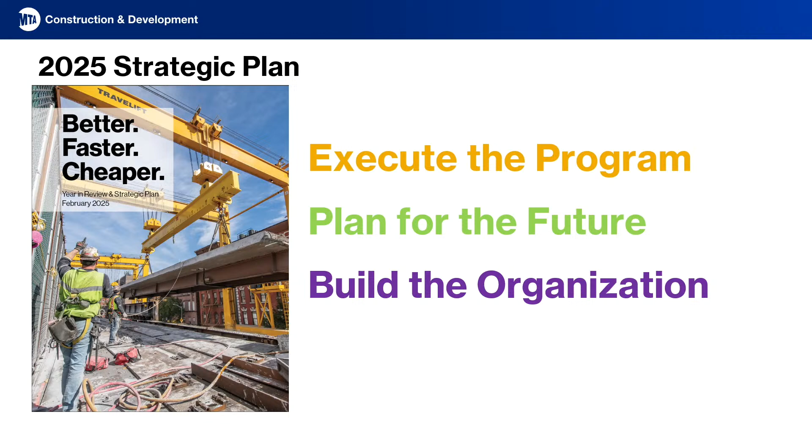So February is when we typically do the year in review for C&D and the look ahead. And of course, while there are major funding questions to be answered, we continue to do the work at construction and development that this agency was created for, to execute the program better, faster, and cheaper, to plan for the future of this vast system of ours, continuing to transform it to meet the needs of the 21st century, including different customer expectations, climate change, in addition to the need for a state of good repair, and to build a sustainable organization that has the professionalism, the specialized skills, the management expertise to deliver far into the future.

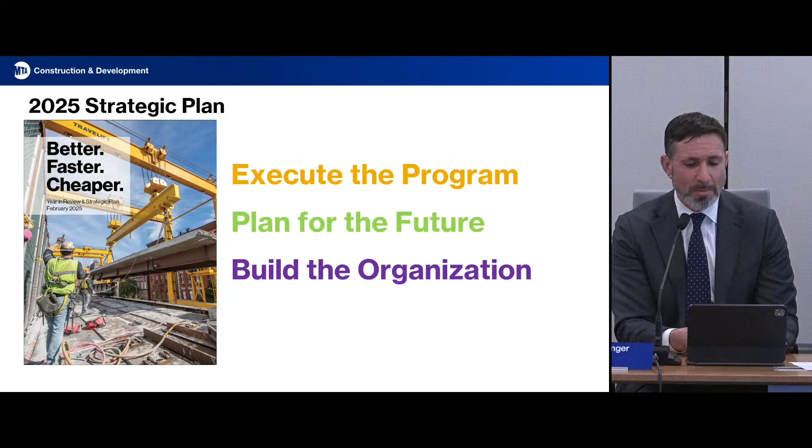We're going to deliver our strategic plan later this week, summarizing all of this, but I want to give you a preview of it today.

So first of all, looking back and setting our targets for the year, in numerical terms, we achieved $4.6 billion in commitments last year. I want to start by saying that this exceeded our target that we set for the year of $2.9 billion by 60%, through a lot of hard work at C&D to get those projects over the finish line and awarded. Of course, this number, as you can see on the chart, overall is less than we aspired to before the complexity of implementing congestion relief slowed us down last year. But nonetheless, we have some really important work that got awarded last year, and at very good pricing.

3 stations, ADA stations in the Bronx for Metro North, Woodlawn, Williamsbridge, and replacement and state of good repair work at Botanical Garden for $157 million, big project there.

Line structure component repairs, we've talked a lot about tunnel structural repairs and the importance of them in our next capital plan, but we awarded a project to do that on the 7th and 8th Avenue lines in Manhattan and the Bronx. And I want to note that we're going to add cell service through our public-private partnership with Boldyn as we do that structural repair work as well.

Park Avenue Viaduct Phase 2, which the board voted to award that additional work on. Evan's going to talk about that in a little bit, but it allows us to do the other half of the viaduct that carries 98% of Metro North service into and out of Grand Central as part of this current project, saving a lot of time and a lot of money.

Okay, is the Grand Central train shed part of that line structure piece? It's not. The Grand Central Train Shed is a project that is awarded and is moving, Sector 1. But also very important work. This is line structures within the subway system, where there's a huge amount of work that we need to get done.

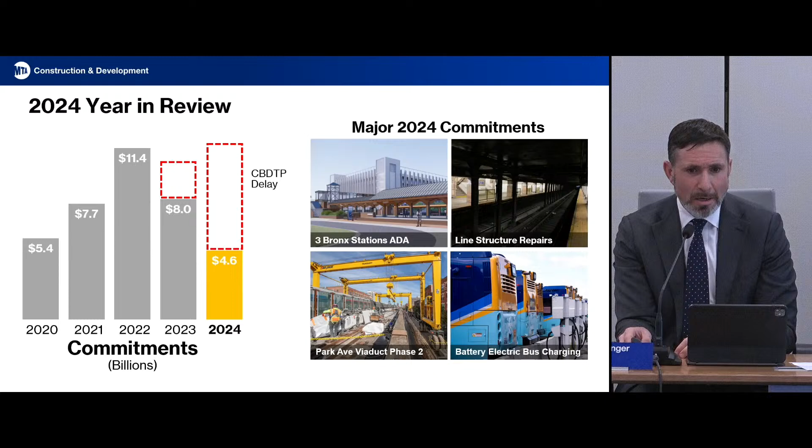All right, here we go. Big commitment year this year. Now that congestion relief is unlocked and we are able to proceed with the projects that we need to do, some key commitments that are not congestion relief funded, critical component repairs.

This is state of good repair work at fan plants across the system, fully electrifying track 1 of 11.5 miles of the Hudson Line, adding critical redundancy and operational flexibility, and dehumidifying the main cables of the Verrazano Bridge. We've talked about this a lot here in this committee.

This project is going to preserve the cables that hold up the Verrazano and extend the life of the structure by decades. So $12.6 billion commitment target, that would certainly be the biggest commitment year ever for the MTA, and we're moving forward in a big way to get it done.

Big forward movement for congestion relief funded projects this year as part of that $12.6 billion target that we're announcing today. We've already awarded 22 dual mode locomotives for Long Island Railroad, 270 more battery electric buses. That option has already been exercised, funded by congestion relief, and we've got big projects moving.

We talked about it a lot, the re-signaling of the Fulton and Liberty lines, the A and the C - that's 42.7 track miles, really critical to get service moving on that line. Of course, the 2nd Avenue subway tunneling contract, for which the RFP is out in the market. At the moment, we're aiming for a summer award of that project.

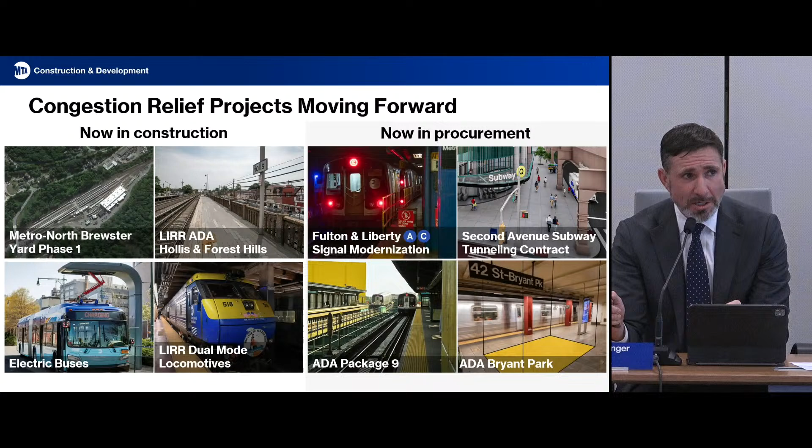ADA packages for 5 stations moving forward: the 3 stations in our package 9, Parsons Boulevard on the F, Briarwood on the E and F, a newly added station to the program, Gates Avenue on the J and Z in Brooklyn, and then 2 stations at Bryant Park within that complex. 18 more stations to go on top of that, funded by congestion relief.

In terms of completions, some generational projects, very complex and some long delayed, that C&D took on and tackled and got across the finish line this year. We finished that most difficult 100th of 100 original key ADA stations at Hunter College, and saved money in the process, both from avoiding utility relocations and bringing the project in under budget.

At completion, we finished rebuilding the Harmon Shop for Metro North. We rebuilt 207th Street Yard, made it much more resilient. It's the 2nd largest yard in our system at 43 acres, and we built a flood wall and dealt with all the drainage around that yard, kept service running the whole time.

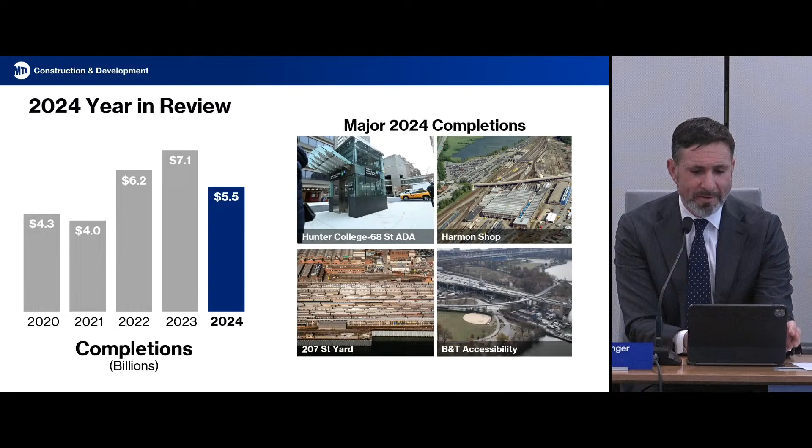We made bridges accessible for bridges and tunnels, Cross Bay Bridge, Henry Hudson, and connections to Manhattan and the Bronx from Randall's Island, with the Queens section to be completed in a separate project in 2027. So some important completions. And for this year, we'll complete $9 billion of work.

We will complete the big ADA package for Long Island Railroad. We've already got 3 stations open and fully accessible in that package, 3 more to go - Laurelton, Locust Manor, St. Albans this year - plus replacements at Valley Stream and Auburndale, and more work on the Verrazano Narrows Bridge. So that's our target for this year.

In the meantime, the work continues to get the 25 to 29 capital plan off to the right start once it's authorized and fully funded by the governor and the legislature. While we have some work left to keep us busy here, we have put forward a $68 billion plan that enables us to move forward with critical state of good repair work that cannot wait. We're taking on some of the key capital maintenance issues that threaten safe and reliable, frequent service across the system. So a lot of projects are moving into design, and we're looking at the big upfront scoping and bundling decisions that determine whether we can execute this work better, faster, and cheaper with the time that we have.

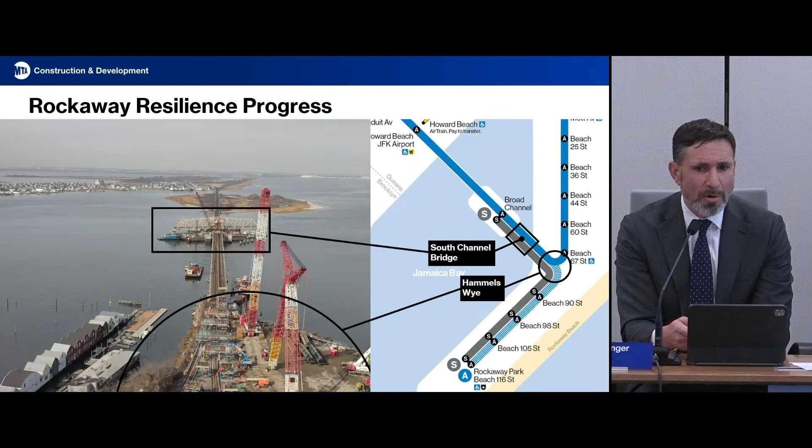So we took a big step back and identified that this was not the way to go, and combined them so we can get all the work done in a $600 million mega project that keeps disruption to a minimum. We certainly don't like any disruption of service, and we've poured on a ton of replacement service, shuttle buses, cross-honoring, and other means of transportation, keeping the shuttle active on the Rockaway Peninsula itself. But we're doing it in the most efficient way, and we will bring that service back before Memorial Day.

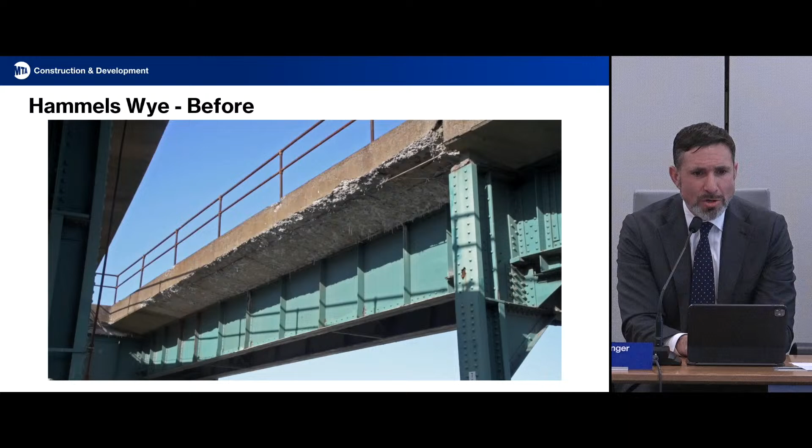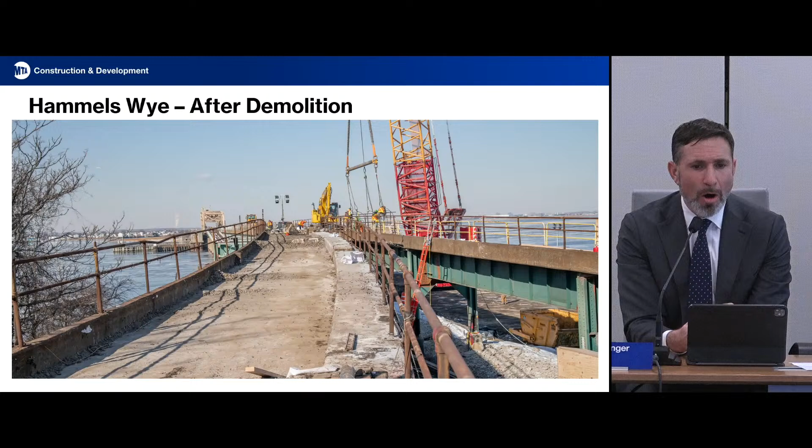A few good shots here. I'm pleased to say that the work during the outage is progressing at an extraordinary pace. You can see the old concrete and steel structure—this is just one month ago when we started. Once we took service out, we quickly demolished the track bed and all the electrical and signal equipment that ran along the top of the viaduct, so the Hammels Wye was no more. This concrete structure I'm showing here was sitting right above where this gentleman is standing in the foreground. That was very quickly demolished.

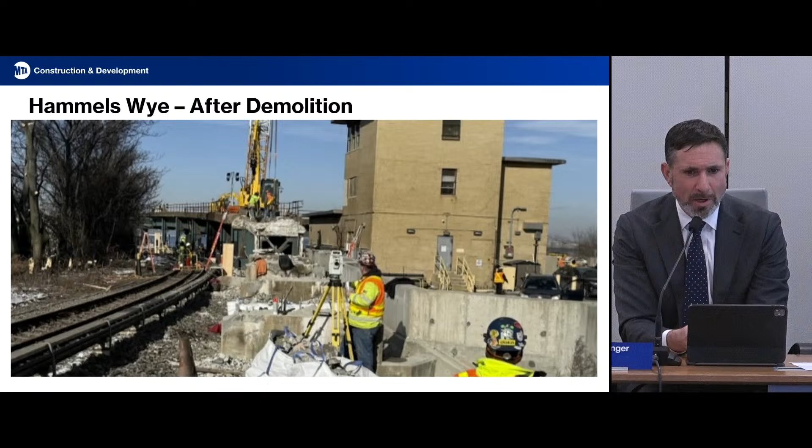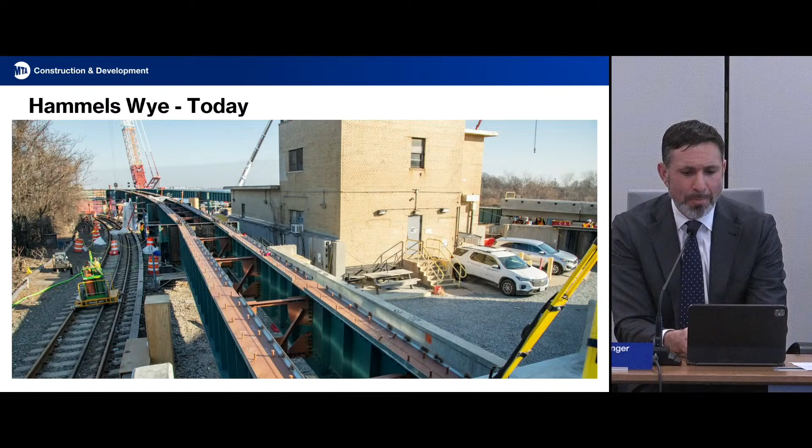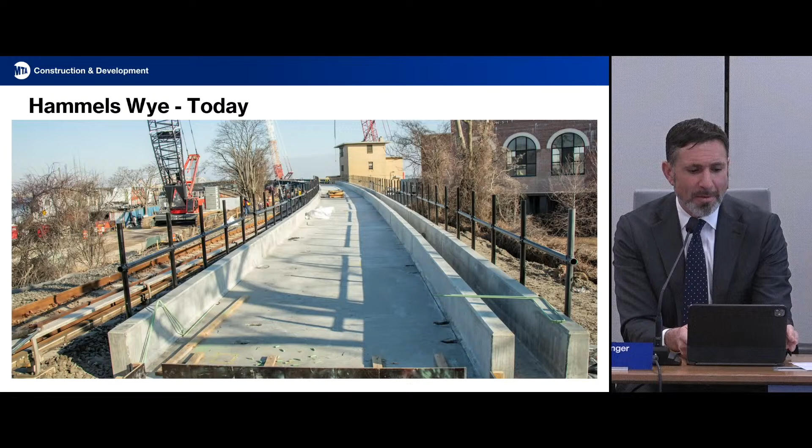But just a couple of weeks later, our team has already rebuilt much of the structure. One big section will sit on steel girders, and as of Friday when we were out there, 30% of those steel girders had already been put into place. Another portion, the concrete section of the future structure, was prefabricated off-site—a great innovation in construction means and methods—and has already been dropped into place on top of the pile caps, ready for all the equipment to follow.

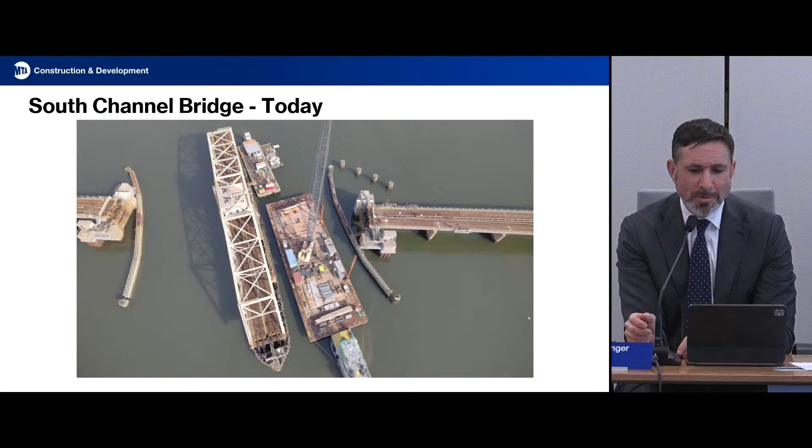The South Channel Bridge has been lashed into an open position so that, as you can see, the maritime traffic, which includes shipments of jet fuel for JFK Airport, can continue to traverse into Jamaica Bay. And all of the mechanical and electrical systems on the bridge have already been demolished and are now being rebuilt. We're on track to bring service back on time and on budget before Memorial Day.

But we have endless amounts of respect for the workers. All forms of labor are out there working, and they're working two tens, seven days a week. So we've got 20 hours of work happening every day, in the middle of the night. Get out to the Rockaway Peninsula, the temperature falls and the wind picks up by 10 or 20 miles an hour, and the work is getting done despite all that. We're very proud of how that project is going.

What's all this strategic planning and innovation about? Cost containment. And we want to talk about that in more detail this week. Like our operating agency partners, we are committed to being great stewards of public funds.

The big innovation of creating construction and development is the prime mover here. The kinds of cost containment we've just talked about are only possible because we have centralized management of all capital work, from planning to procurement to delivery. We take responsibility for it from beginning to end, and it allows us to intervene in the places where we need to in order to get the work done better, faster, and cheaper.

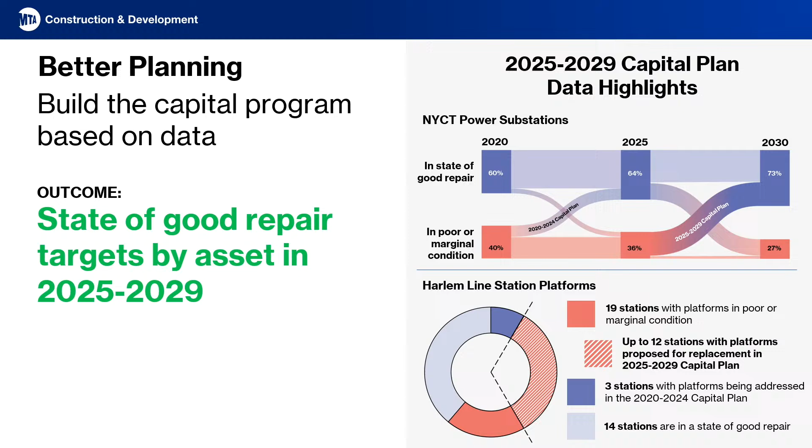The 20-year needs assessment resulted in our proposed 5-year plan that's focused on state of good repair. In the 5-year plan, an important metric we set was not just the proposed budget, but also what the public would get from the investment. What I mean is, asset by asset, we're projecting state of good repair outcomes at the end of the 25 to 29 program.

On the upper right here, you see our famous Sankey diagrams where we show you where on state of good repair we were in 2020, what the 20 to 24 plan was supposed to get us, and where we anticipate we'll be at the end of the 25 to 29 program, assuming both how much work gets done as well as how quickly we anticipate the assets will continue to deteriorate.

This predictive model is new and helped us identify the right scale of investment and helps us prioritize which categories need more investment than others. It also has the benefit of giving the public a deeper understanding of what they're getting for the dollars spent.

Getting our assets into a state of good repair is not the only factor in picking the right projects. We need to be smart about the scope, and one way is to anticipate the risk.

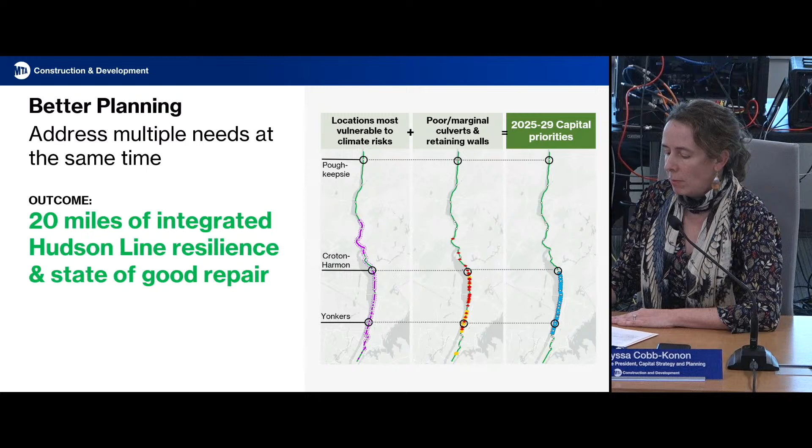Climate and weather have cost us countless hours of service delays, and that's why a project like the Hudson Line is important. Here we've layered on more than one criteria, state of good repair and weather. So when we say we need to address resilience on the Hudson Line, it means that when we rebuild the 25-plus culverts on the Hudson Line that are already in poor and marginal condition, we're building them to the right size so that we don't have major washouts that impede service.

Another way to build smarter is to make sure we're planning for the function the asset serves. By way of example, we've all heard about Livonia and 240th Street, that the conditions there are deplorable, but also that the layout of the facility is obsolete. 240th and Livonia are part of a much bigger system of shops and yards that encompass over 440 acres in New York City, built 100 years ago by competing subway lines.

With subways, we'll be redesigning Livonia and 240th so they fit into the overall system, improve efficiency, and deliver the best possible service for New Yorkers, making way for CBTC on the A division.

We're excited to take on this kind of work across the portfolio, implementing an integrated planning approach to help ensure that we spend money wisely, deeply understanding the condition of our assets, and layering on what we need to do to modernize the system, to build it for another 100 years of service, adapting and anticipating ridership trends, and where public and private and cross-agency partnerships can be found across the system.

With that, I'm handing it over to Steven Loehr.

Thank you, Alyssa. Good afternoon, everybody. I'm Steven Loehr, I lead the development department here in C&D. What we do is take the priorities identified by planning and our operating agencies and package that work together into contracts for optimal execution, then hand them off to Evan.

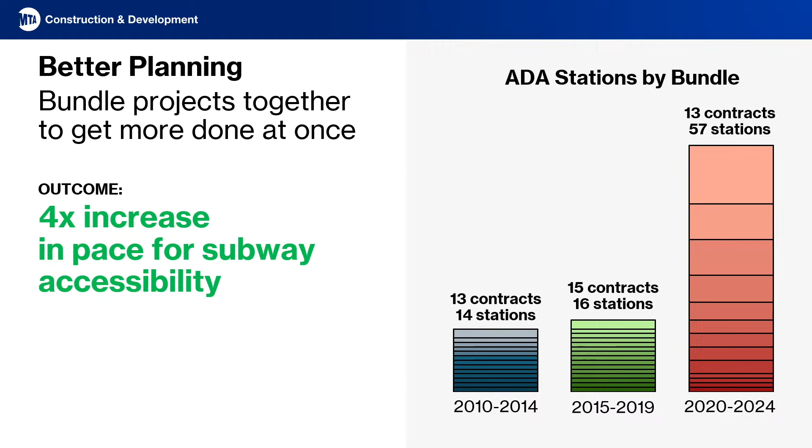Before I get to that, in the current 2020 to 24 plan, bundling has allowed us to dramatically scale up the level and pace of work in areas like ADA stations—a fourfold increase in the number of stations we've awarded, because these larger contracts let us scale up as we deliver.

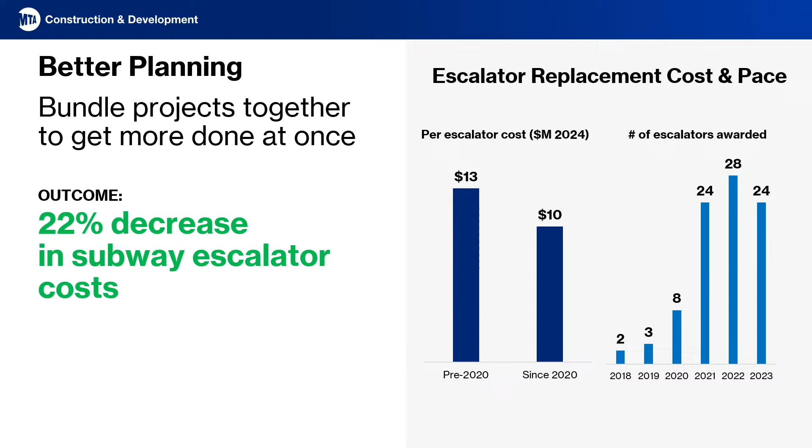It's also allowed us to save money by leveraging economies of scale. A great example is escalator costs, where the unit cost has decreased by more than 20% by awarding these together in larger contracts. That's the kind of work we want to continue in the next plan.

But we're 5 years into this, so we've graduated to the advanced level of bundling—getting more sophisticated, getting creative, and learning lessons from the 2020 to 24 plan, so our bundling isn't just about creating bigger projects now, but really creating better projects.

We've been launching the next plan by systematically going line segment by line segment, laying out all the needs and breaking down traditional divisions between types of work that we've usually planned around. I'll give you two examples.

Our ADA projects typically include electrical work just by virtue of having to include an elevator. We realized that while a contractor is there doing that type of work, if there's a circuit breaker house at the end of the platform, they could just as well take that on. Traditionally we'd consider that an infrastructure project, part of our power system, a different thing entirely. But we've broken down those walls to say this contractor is capable of doing this type of work—let's pick it up here.

Similarly, when our infrastructure unit repairs structural defects within the tunnels, they could just as well repair columns on a platform of a station they're passing by, which traditionally would have been a separate stations project.

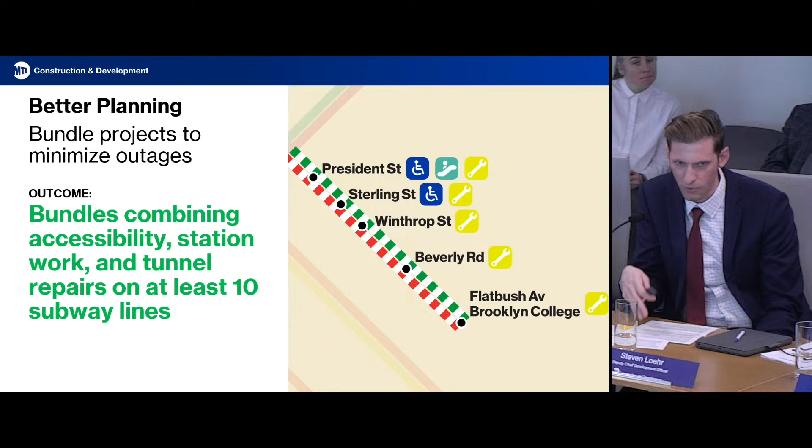So far we have at least 10 of these integrated bundles, still working through the later years of the program. Shown here is one example on the Nostrand Avenue line, where we have component work at 5 stations—2 ADA station projects planned, an escalator replacement, and structural defects all along the line. Traditionally this would have been 4 separate projects, all competing for resources and access with their own jostling schedules. Now it will be one integrated project, executed simultaneously.

We need to get 12 stations rehabbed. We'll be doing that in successive waves, immediately following one another over the course of the next 4 years. We have one master plan for that to make sure it all gets done.

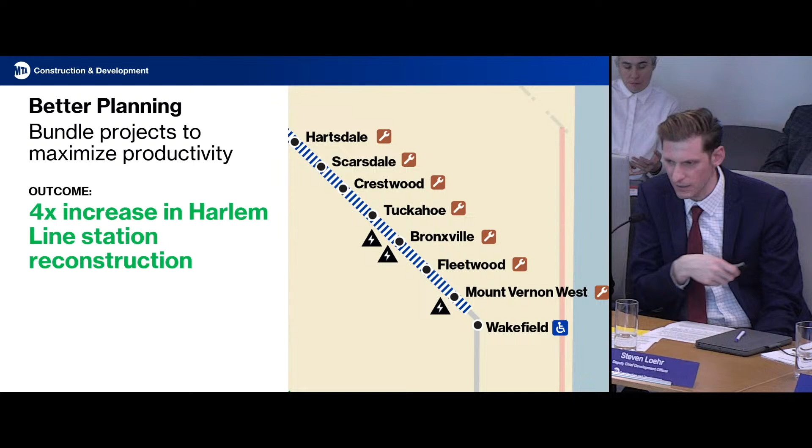So it may sound basic, but it's a very significant shift in the way we organize our work, and it will yield tremendous benefits, both in terms of minimizing disruption, which is key, and in terms of reducing our costs. We're very excited about that—not least of which Evan, who gets to contract out all these bundles for us.

In our contracts group, we're giving a lot of attention to updating our contract documents to address cost risks raised by our consultants and contractors. During procurement, we encourage questions, comments, and proposed alternative contract language, and we regularly meet with contractors and consultants, both individually and through industry groups like the GCA and ACEC, to hear their concerns. Through that engagement, we've identified numerous contract provisions that we've modified to remove historical language that is often one-sided. The most obvious of those was replacing the chief engineer provision.

They were the sole trier of facts, and now we use a neutral arbitrator. But we've also addressed risk in other ways. One example of that is our new utility relocation risk-sharing provision.

This provision apportions costs to the design builder only up to a predetermined amount. If there are utility costs above that amount, the MTA and the design builder share that risk up to another predetermined amount, at which point the MTA takes on the risk. So in this way, we've incentivized the design builder to keep costs down and at the same time limit its risk exposure for conditions that could not be anticipated.

Another new risk-sharing provision provides for compensation for certain instances of delays caused by the unavailability of tracks or access to force account, which were historically non-compensable delays. We also have recognized that prompt payment is an important consideration, and we've implemented a process to provide quicker payments for directed change work. And we've addressed other issues that have been raised, like indemnification, standard of care, and insurance requirements.

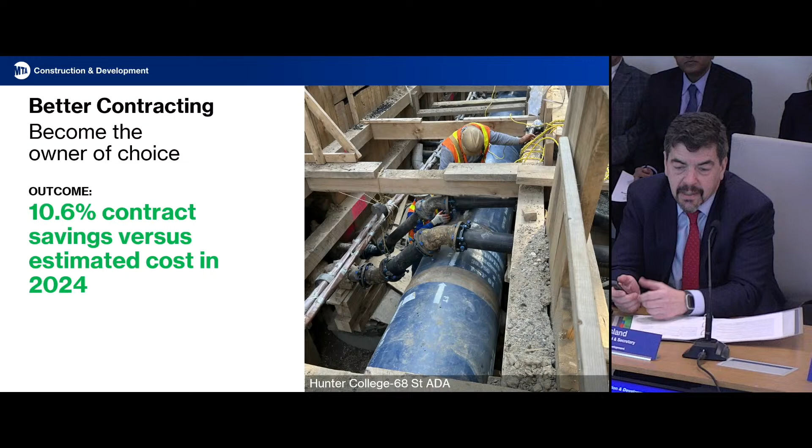We've seen good competition since we've implemented these changes, and the 10.6% contract savings versus estimated costs in 2024 I think recognizes these changes that we're making and the competition that we were getting.

So we're also looking at getting the delivery model right. Introducing design build was transformative for C&D, but we're now evaluating contracts earlier. We're making wiser decisions about when to use design build and when to use other delivery models to best encourage competition and innovation.

So we've been using A+B bidding to our advantage for smaller contracts and those where there's not much room for innovation. A+B bidding allows us to take into consideration schedule and track access. In evaluating best value, it also helps us to get smaller contractors involved, and that helps us to keep prices down.

And on more complicated projects, we're engaging with contractors early, both pre and during procurement, to encourage alternative technical concepts and innovation. One example of that, Jamie mentioned earlier, is the Park Avenue Viaduct, where the contractor, through its innovation, saved us $95 million and 4 years on the 2 phases of the project.

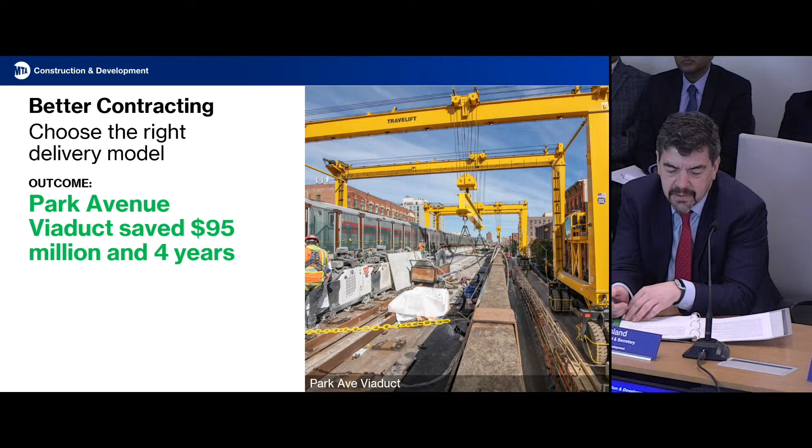Notably, this contractor did not propose the lowest price, but because of the schedule and track outage savings and other innovations it offered, it came in as the best value to the MTA. Another example of contract innovation is our accessibility packages.

We've hit our stride on those. We were up to 6 bundles that have been awarded, plus some additional station complexes, and we improved those contracts with each iteration. We're seeing good competition, and design builders are seeking to participate in multiple packages.

And the risk-sharing strategy that I mentioned before is one example of an improvement that was developed using these or during these ADA packages. We also awarded our first public-private partnership, which is going quite well and has brought us a new elevator supplier, Otis Elevator, which prior to this P3 was not proposing on our ADA project.

So implementing new delivery tools is helping us to increase competition as well. On the ADA packages, we've seen savings bid versus estimate of $243 million since 2020. So with that, I turn it over to Mark to deliver the packages that we've now contracted for.

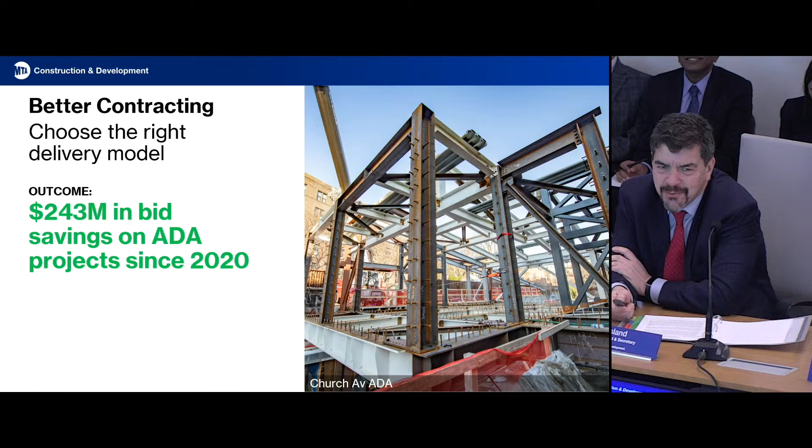Thank you, Evan. I get to look over the design and the construction of our projects. So I'm going to give you a couple of examples of our projects and what's really changed over the last few years.

I don't know if you realize it, but you approved a project back in December of 2022 called CBTC Crosstown. You approved $380 million to do that project. I don't think you realize that that was $300 million less than was expected. We saved almost 50% of the cost of that project by doing it differently.

What we did differently was we got out of the way of the design. We gave the design and the construction over to one entity, a modern entity, a global competition on how do we do these projects better. We have saved $300 million. It's an enormous change in how we attack all of our crosstown and our CBTC projects going forward, and it is a model that we are using for all of our remaining projects.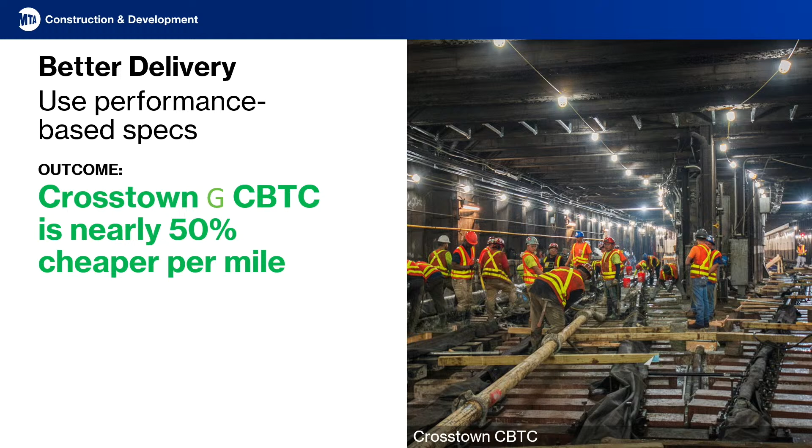What is very interesting about this project, and as we make improvements for the next, the second bidder in that competition didn't believe that we would do it. They didn't believe that we would make that change. We made that change. We've now got more bidders in the game for our next project than we've ever had before. That is a huge example of the changes we are making to deliver real value.

Here's another example of real value change. We don't let any project out the door anymore without us pretty much ripping it apart.

Why are we doing it this way? Why don't we do it some other way? This is an example of someone asking: why are we putting elevators first to the mezzanine, and from the mezzanine up to the platform? Why are we doing that? Why can't we just go straight up?

Well, it turns out it was just the code, an interpretation of the code that was stopping us from doing this. So we went and rewrote the code with the state officials in New York, upstate, changed it, and that has correspondingly saved us about $250 million going forward. These are huge and real examples of the kinds of savings we're making on all of our projects.

Evan mentioned A and B bidding. It's about accountability: how do we make sure we get the value we put into our bids and our procurement actually on the ground? In the past, we would tell contractors you can build this project as long as you do it within this number of outages, and that was okay. Well, we changed that game.

The bidders now have to give us the number of outages, the number of track disruptions, the number of issues on customers every day. How do they put together a plan, and what number of outages do they want? If they don't stick to those numbers, we bill them. We have completely changed the way we do our projects, and more to come.